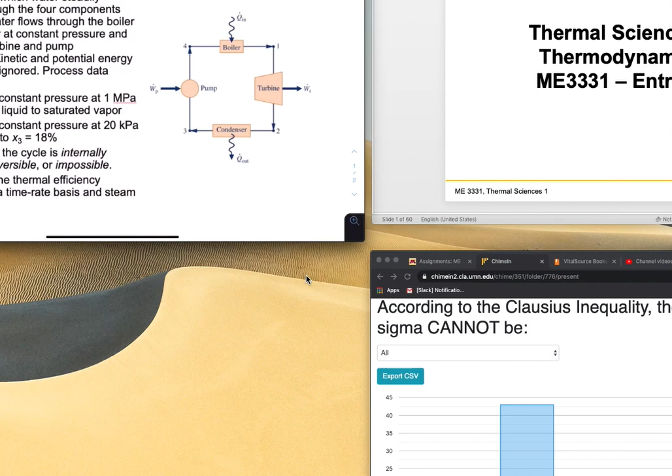Let me see if I can get the right slide up here. Okay, so as usual at the beginning of our lectures, we consult the previous survey question that we had, and let's see how people did here. Okay, not as good as previous surveys, but let's take a look here.

So let's see, greater than the net work output. Well, technically the value of sigma is not greater than the net work output. I mean, they have nothing to do with each other. As we remember, only the temperature is in the Clausius inequality.

As you remember, let's go back and look at what we did here. So if we look at the second law, we're going to do this example next. Let's look at it here. So here we go, this is it. Nothing to do with work in here. There's no work. It says here that the cyclic integral for some process that goes around in a cycle, or for any process for that matter, the change in heat over the temperature at which that heat transfer happens is equal to negative sigma of the cycle.

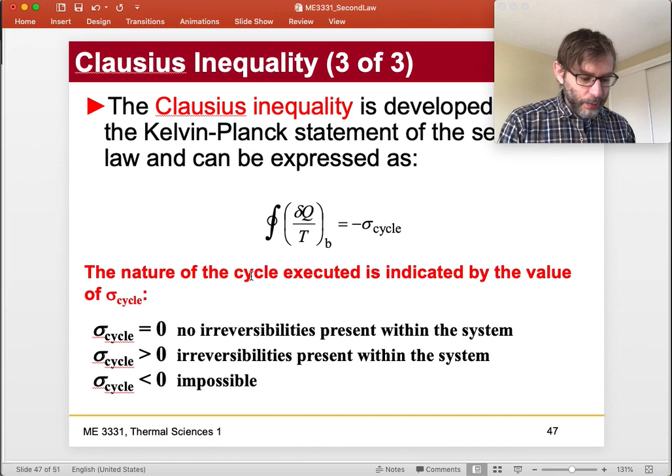Okay, all right, so let's see, what are we doing next? So the next thing we're going to do is a final second law example before we move on. And the final example given here is actually a little complex. It's a cycle, a thermodynamic cycle that we're going to solve.

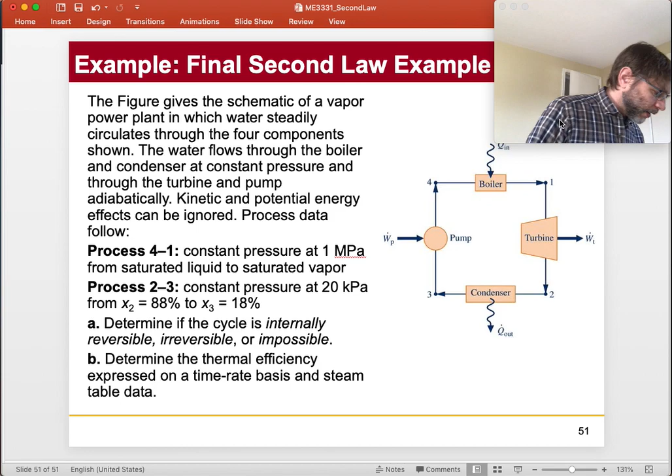To solve this cycle, let me get to the right screen here. Okay, so here we go. Here's the cycle. The figure gives a schematic of a vapor power plant in which the water steadily circulates through four components: a pump, boiler, turbine, and condenser. The water flows through the boiler and condenser at constant pressure, and through the turbine and pump adiabatically. Ignore kinetic and potential energy effects. And the process data are as follows.

So process 4-1 is a constant pressure process at 1 megapascal, operating from saturated liquid to saturated vapor. And then 2-3 actually operates within the vapor dome, it looks like, constant pressure at 20 kilopascals, from X2 equals 88% to X3, which is the quality at 18%. So it's dropping quality. Determine if the cycle is internally reversible, irreversible, or impossible. Determine the thermal efficiency expressed on a time rate basis, using the steam table data. All right, so let's do that.

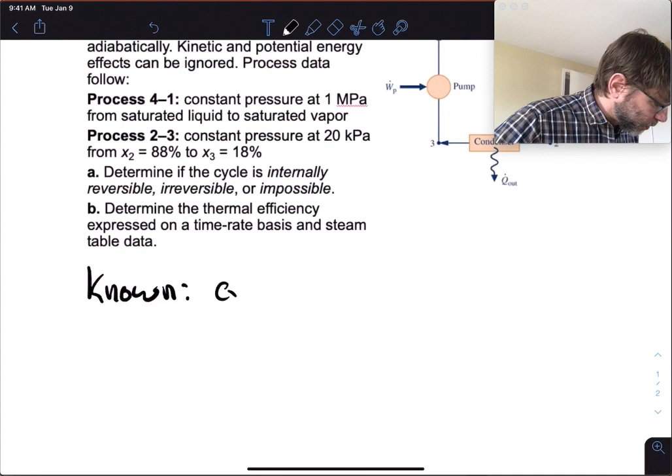Let's see, so let's see what we have here. I'm just going to start the process here. Then we have a cycle with given processes.

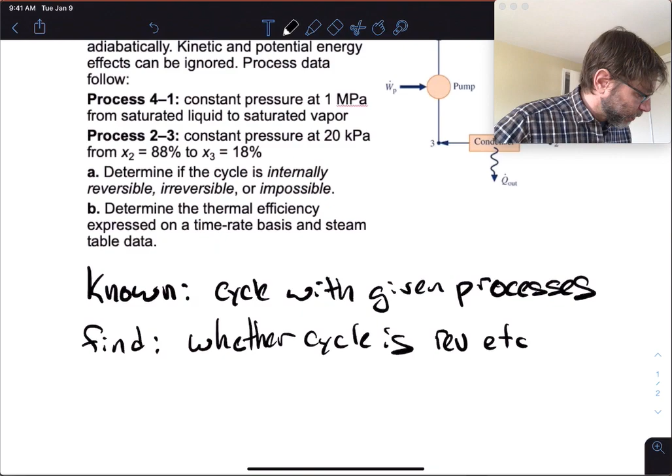What we're supposed to find is whether the cycle is reversible, etc., and also determine the thermal efficiency.

Thermal efficiency expressed in time rate based on steam.

Whoa, we got the cat again. Hello, this is Lola, by the way. She likes to jump up on my screen when I'm giving lectures. She can sit here on my lap, actually. If she behaves, she can sit on my lap.

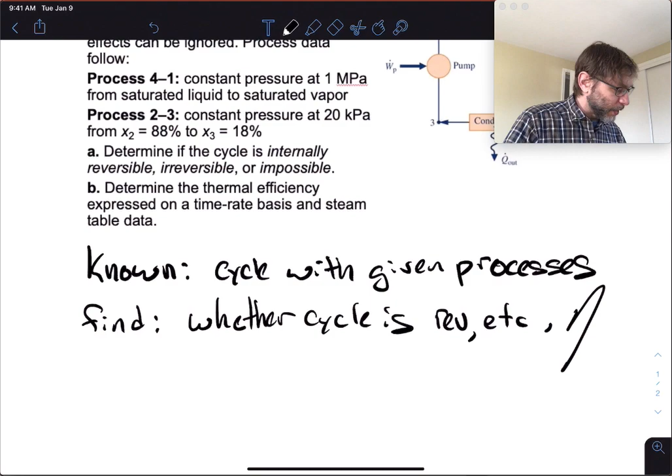And the thermal efficiency, okay, let's try to figure this out here. All right, Lola, you ready? Okay, let's do this. Next thing we're gonna do here is some assumptions.

So the assumptions are that we have, let's see, first thing is we're going to assume we have a steady state cycle.

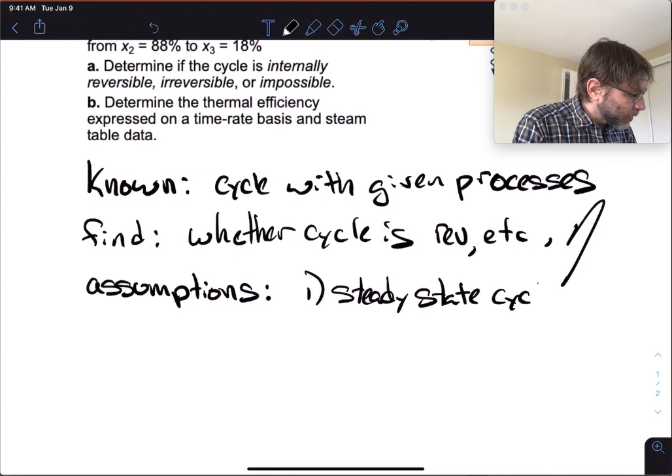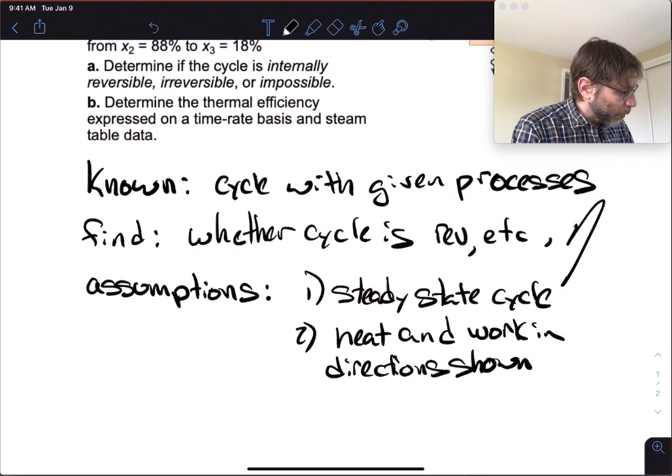Second, we're going to say that we have heat and work in directions shown on the diagram, but maybe we'll remake the diagram. Essentially our system is here, right, so that we have some work and heat kind of crossing the boundary, going in and out. So we're assuming this is Q in and Q out.

Okay, anything else we do? Let's see, we're gonna neglect kinetic energy and potential energy differences. Anything else? I guess we're going to assume that we have some adiabatic processes, so some processes that are adiabatic. Big deal, okay, we'll get into that when we talk about the individual processes.

Okay, so let's first make a diagram of what happens in the cycle. The one diagram we really need to make is a PV diagram, right? So we have P and V here.

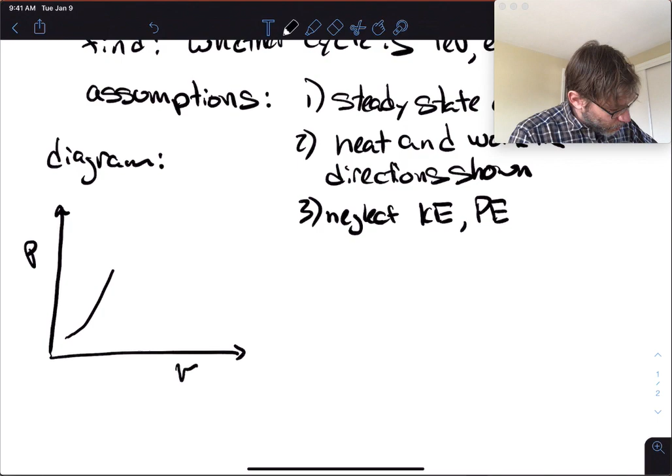Remember that whenever you have a cycle that operates with saturated liquid and saturated vapor, you've got to put it under the vapor dome. Remember, the vapor dome looks like this. Okay, oh, my vapor dome's a little lumpy. It kind of looks more like that. Okay, oh, that's a much better one. What do you think, Lola? Is that good?

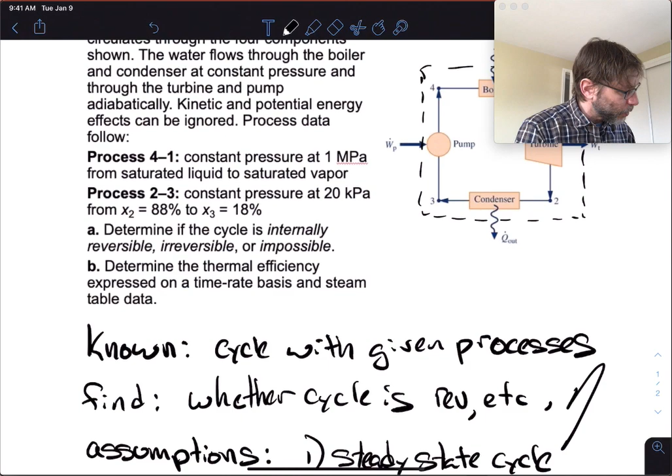Okay, now let's see, what processes are we talking about first here? Process 4-1 is a constant pressure at 1 megapascal, so it's at higher pressure. So process 4-1 here is boiler, right? So boiler is happening at constant pressure and there's heat going in, and it operates from saturated liquid to saturated vapor at 1 megapascal. So you know it operates from here, from 4 to 1, like that, okay? Remember that.

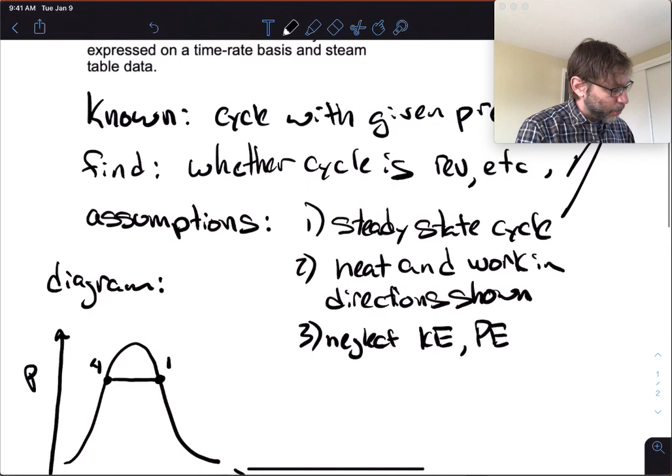Okay, so the first thing is, it's a constant pressure process, and it's going across the vapor dome at 1 megapascal. So then we could just make these things like this, right? This is at 1 megapascal. Actually, that's temperature, sorry, this is 1 megapascal, okay, we just say MPa here, okay, we can do that.

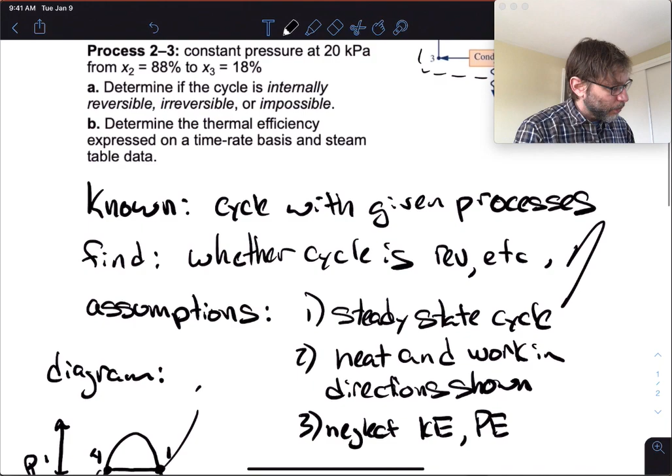And then we have process 2 to 3, which is the other constant pressure process at 20 kilopascals, from X2 to X3, which is 88 to 18. All right, so it's going to be kind of like, oops, put the eraser on, here we go.

And, whoops, let's see, so let's draw this constant pressure line like this, okay? And this is, let's see, let's get rid of this here. So this is 2, and this is 3, and so it's like this. So we're gonna have 1, 2, 3, 4.

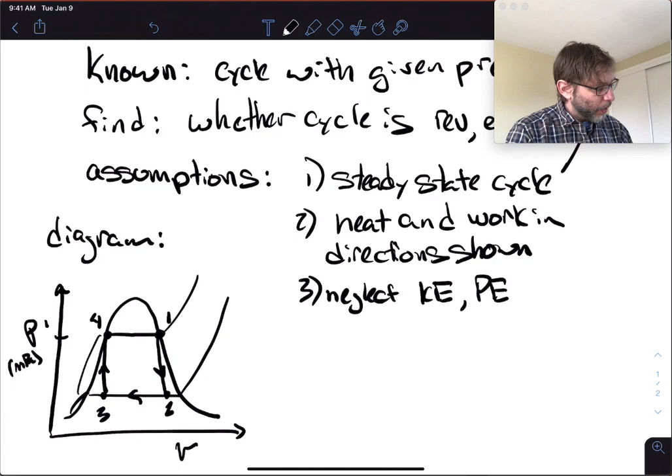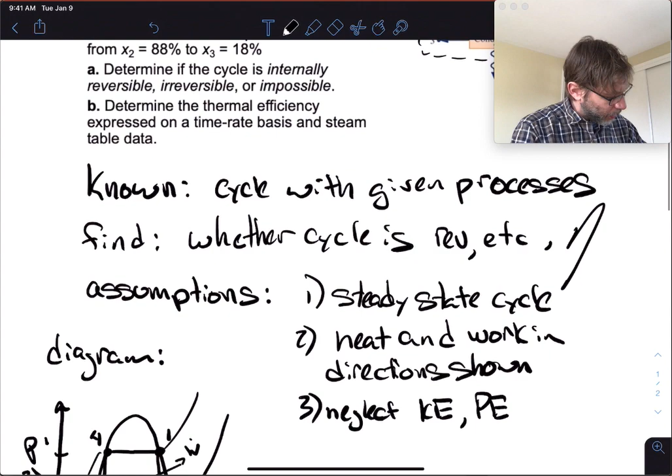Okay, so these are, well, let's see, water through the turbine and through the pump are adiabatic. So these are adiabatic. So 1 to 2, as you see up here, 1 to 2 is a turbine, we're making work, so we're just going to say we have some work here. 4 to 1, we have some heat in. So sometimes we do this in these cycles, so we have Q in, we have Q out.

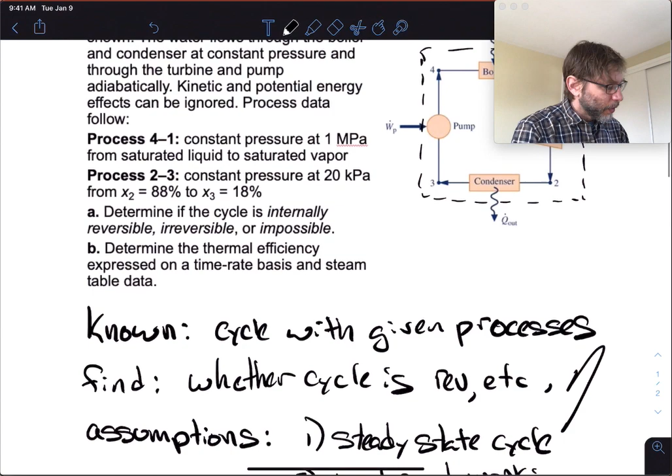We know right away that this cycle is possible, right? We're not exchanging heat with only one reservoir. We're making work, but we have some work going in here too. So this is an interesting cycle, actually, since we're operating all inside the vapor dome. This would never work—this pump would never work, actually. From process 3 to 4, forget it, you can never pump stuff that's all bubbly, saturated liquid stuff.

That would never work, okay? So no matter whether this is a thermodynamically possible cycle, it's an actual impossible physical cycle.

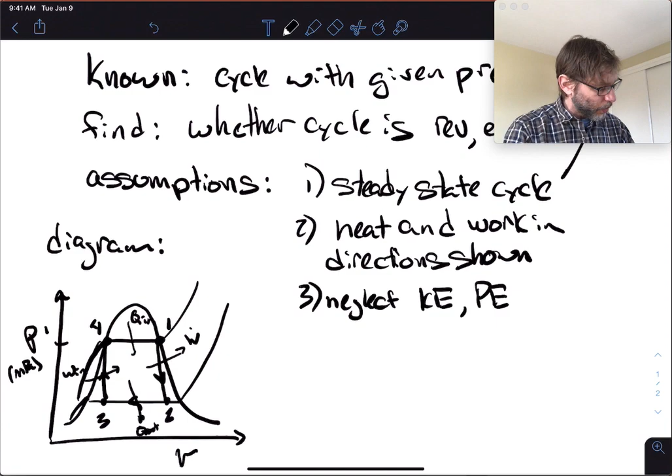Usually we do the pump. When we do the Rankine cycle, we'll tell you all about this. But for now, this is our process: 1, 2, 3, and 4. Okay, I think we're good now.

So we have work in and work out. I think that's what they're calling it here - work turbine, work pump. I'm going to call it work in and work out. Okay, all right, so now...

Let's do analysis here. So what we're really trying to find is the sigma to determine whether the cycle is irreversible, impossible, or reversible. So we're going to use this one.

And remember, as I said, this has nothing to do with the work. Who cares about the work? This is all about the Q. So Q dot 23 over the temperature at which that happens, T23. In this case, T23 is constant - phew, no integration necessary.

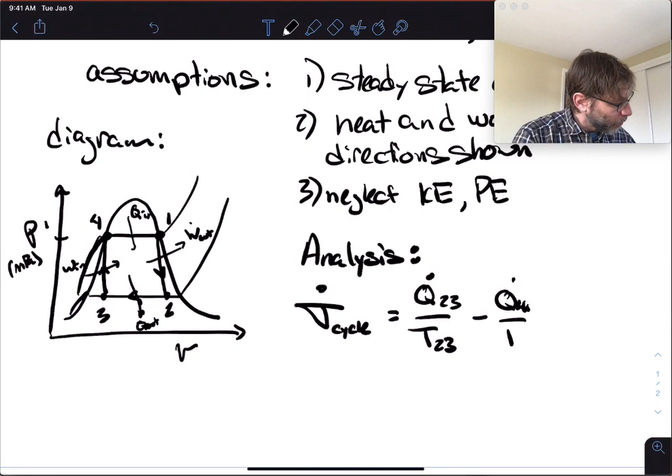Okay, and then minus - let's see, we have minus the Q41 over T41.

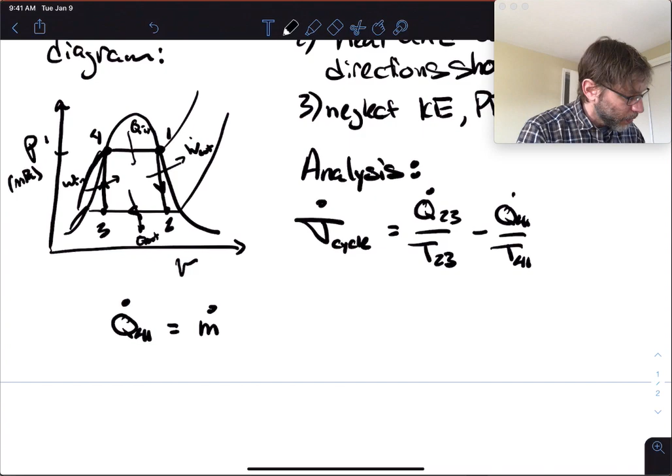Now how are we going to solve this? So Q41, let's do the first law. So Q41 equals m dot times H1 minus H4. Is that right? Yeah, because essentially we have no work term, plus work term, we're going to just call it 0. So this is what we call Q dot in.

Right, and remember, so this is example 1 continued. So then remember what we have to do is look at the vapor table, so we look at the PV diagram. This is actually a little easy to look up.

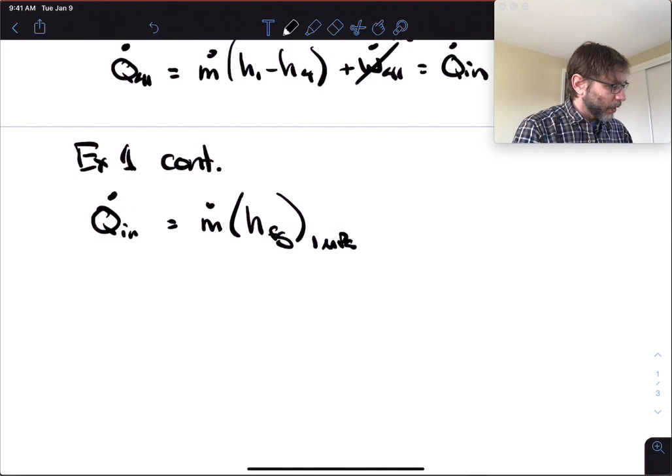Because if we have 1 megapascal, this Q in is equal to m dot times HFG, which is HF minus HG at 1 megapascal, and that's pretty simple to find. We're going to just have to find this later, but if we want to do Q23, we're going to need to find that.

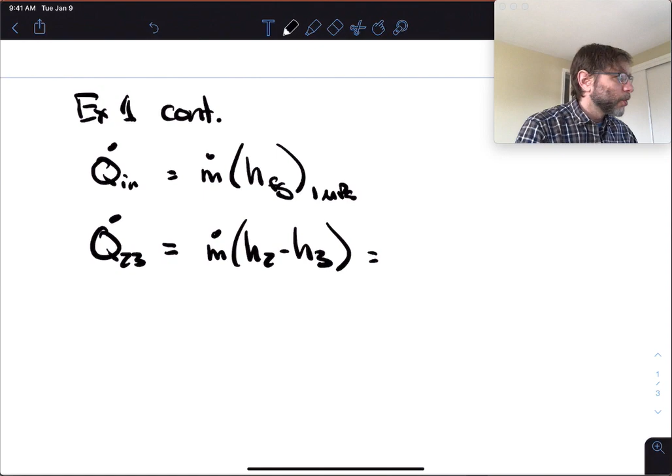So Q23 is also equal to the same thing, m dot times H2 minus H3. But in this case we have to use the steam quality, so this is going to be m dot...

Remember that m dot is constant because the cycle is at steady state and the fluid is going all the way around it. So there's no - the cycle is constant.

So then m dot times HF plus X HFG evaluated at state 2, minus HF plus X HFG evaluated at state 3. These are at the same pressure, so this is actually not so bad.

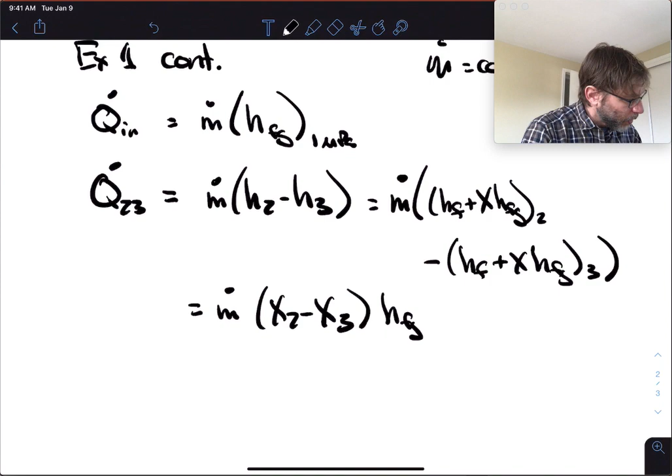So this is not so bad, right? Yeah, X HFG. So we can simplify it - m dot, because they're at constant pressure, we can just say this is X2 minus X3, HFG at 20 kilopascals.

Okay, all right, so let's do this. So yeah, all right, good, so this is pretty good. So HF - remember HFG is equal to HF minus HG at some pressure.

Okay, remember that, just wanted to make that clear. Don't get confused by that. Okay, all right, so let's see.

So then let's just plug that into our sigma of the cycle equation, which is equal to X2 minus X3, HFG at 20 kilopascals, over T23, which is Tsat, the saturated temperature at 20 kilopascals.

And then we can look up these things at the pressure table. This is HFG of 1 megapascal over T41, which is Tsat at 1 megapascal.

Okay, all right, so if we look at the saturated pressure table, which is from table A3, I'm not going to look at the table. I'm assuming you guys are good enough by now to figure out where the table is. I have the numbers copied down here, so I'm going to just use the numbers.

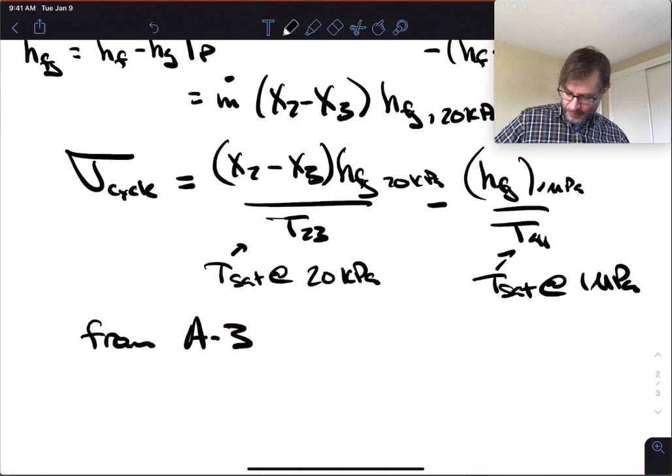And the cat is shedding all over me, so this is springtime - springtime with kitties. Okay, here we go. Yeah, okay, she's still here. You like thermodynamics, huh? Or you're hungry, either one or the other. Okay, so let's go.

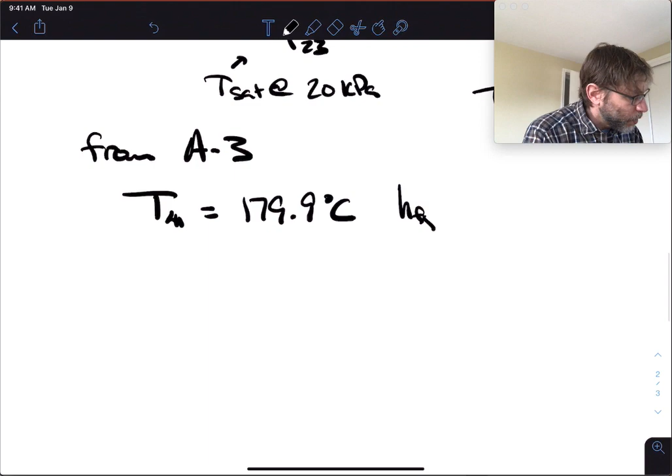Let's see, T41. So Tsat at the higher pressure is 179.9 degrees C, and HFG at that pressure is equal to 2015.3 kilojoules per kilogram. Make sure I get my numbers right.

So if we plug all these things in, we're not given m dot, but we can just divide by m dot. No big deal, because m dot's constant and it doesn't really change the direction of the sign because it's being multiplied by the whole thing. So it's not a big deal, right? In fact, I think I should have done that already up here, because I got rid of m dot already.

Okay, so if we do all this and plug all the numbers in, we get 0.88 minus 0.18, which are the qualities, times 2358. I'm just going to leave the decimal places off because it's not going to make very much difference.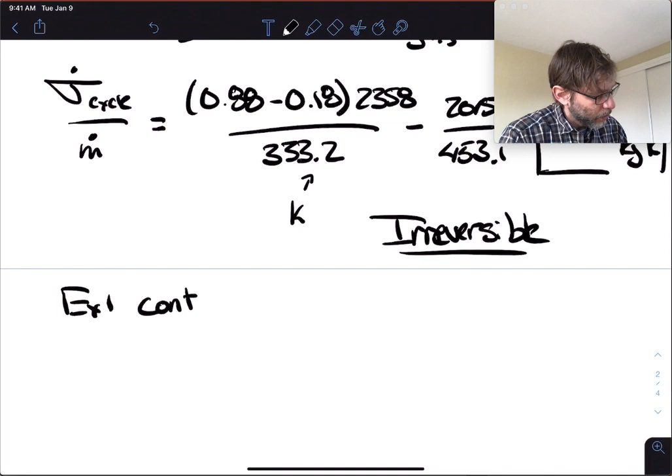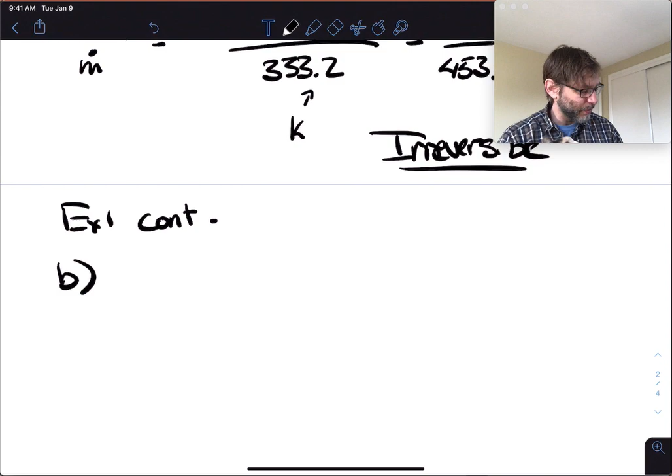And then we're going to do part B now. So part B is asking for the thermal efficiency of this cycle. Just think back. What do you remember about thermal efficiency? What is it? No, that's not it. Okay, so thermal efficiency is work of the cycle divided by heat in.

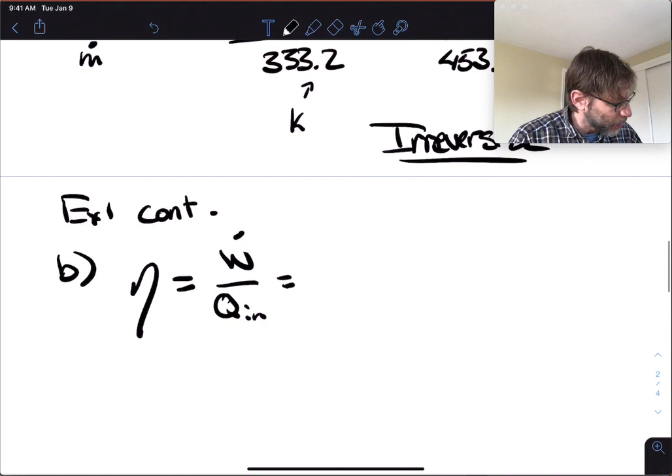Okay, so we are calling this W net, so this is net work of the cycle. So net work of the cycle is the work out minus the work in, right? Presuming we have net work out, which we're just going to presume in this case.

So Q dot, make sure these are dots. This is if we just do the first law, because we already know how to do the first law for a cycle, it reduces to this, right? Because you can say the work is equal to the net work out minus work in is equal to heat in minus heat out. Okay, and then you can just get this following equation, and then we already know what those are because we just solved them.

1 minus Q23 over Q41, with the dots. And then of course we don't have the dots, but we can always just divide by mass flow and we can get it.

So then we're going to end up getting 1 minus x2 minus x3, hfg23 over hfg41, right? And this is equal to, if we plug this all in, I'm not going to put the numbers in, 0.18 or 18%.

Pretty bad. 18% thermal efficiency, that's really bad. If we had a steam power plant that had 18% thermal efficiency, yeah, we would be paying a lot for electricity.

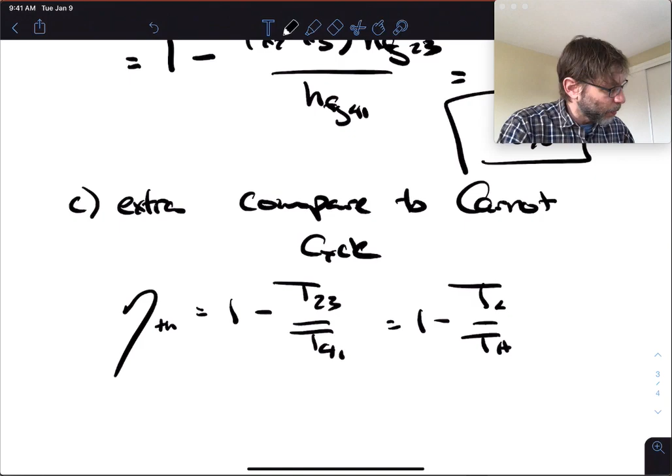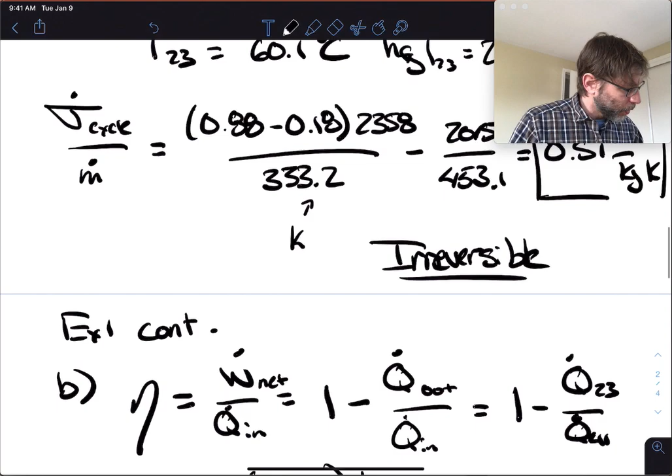So then TL over TH, this would be 1 minus 333.2 over whatever the temperature that we had up here. What was it? 453.

453.1 is equal to 0.265, or 26.5%. So thinking about it, if we wanted to be fancy, we'd say ideally, if this cycle were operating under a Carnot cycle, it could have 26.5% thermal efficiency, maximum.

Then sigma would be 0. All right, but we actually got 18%.

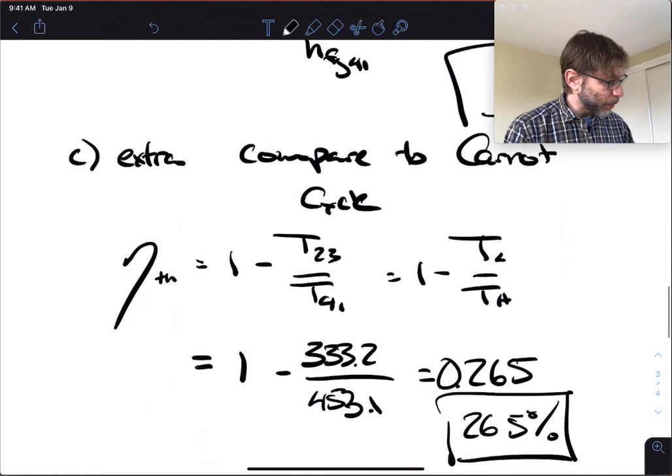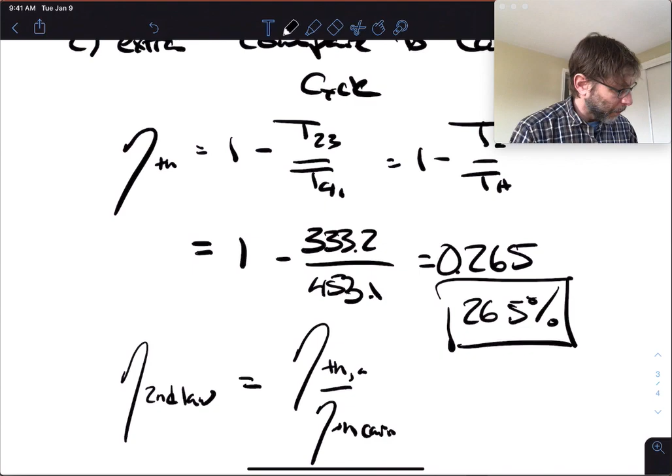One could come up with a metric called the second law efficiency, which is equal to the actual thermal efficiency, the first law, over Carnot. I have not calculated this yet, so we could say 0.18 divided by 0.265.

Let's see, do I have a calculator? I got a new phone, so I'm not going to find the calculator easily, but oh yeah, here we go. 0.18 divided by 0.265 is equal to, we can say the second law thermal efficiency is 67.9%.

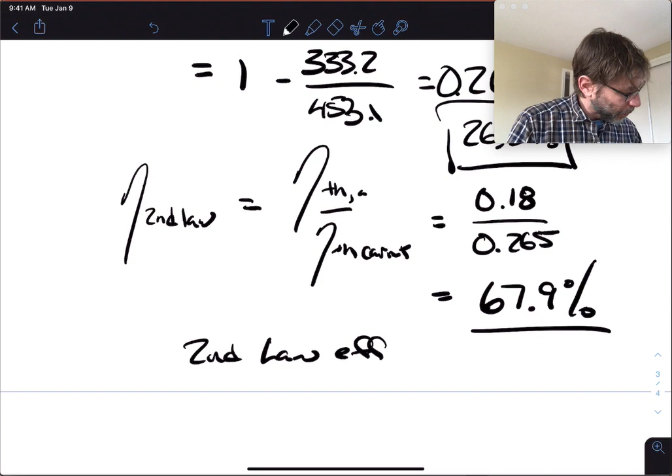We call this the second law efficiency. That's not in the chapter, I'm just giving that to you as bonus extra stuff.

We can develop a first law efficiency, which is the work out over the heat in. So we'll call this actual. This is a first law efficiency, and we'll call this a second law efficiency.

67.9% means we're getting 67.9% of the ideal efficiency for this cycle. We could get a lot better than that, right? We can get closer to the ideal efficiency if we use better processes.

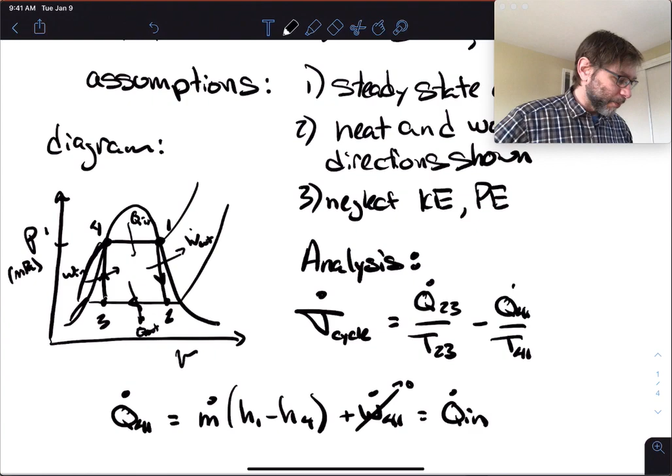As I said earlier, developing a pump that doesn't operate over such a huge temperature difference would be ideal. But from 3 to 4, pumping fluid that's in the two-phase region is never a good thing. So chances of that actually happening in real life is poor.

Okay, so that's it for chapter 5. Let's be done with chapter 5 and move on. So the next thing I want to introduce to you is the concept of entropy.

The concept of entropy is, as I said, pretty enigmatic. It's derived based on the second law. People say it's a result of the second law, the property itself, entropy. I may not have time to give you a full treatise on this, but we're going to do our best and get as far as we can.

In this chapter, we're going to explain the key concepts related to entropy and the second law, including entropy transfer, entropy production, and the increase in entropy principle. It's very close to the sigma idea, the idea that sigma is always positive. We'll evaluate entropy change between two states, and analyze isentropic processes using appropriate property data.

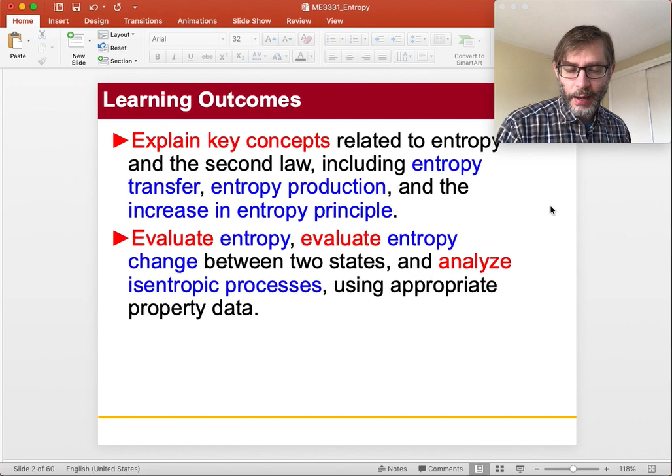So spoiler alert, isentropic process means adiabatic, meaning no heat loss, and reversible, meaning the process operates in a reversible way. We'll represent heat transfer in an internally reversible process on a temperature-entropy diagram. The TS diagram is going to be our new TV diagram.

We were doing PV and TV diagrams. TV and PV diagrams are kind of redundant. But if we look at the TS diagram, that actually gives us further information. It really can give us insight as to what's happening in the process or a cycle.

We're going to analyze closed systems and control volumes, including applying entropy balances. We're going to use isentropic efficiencies for turbines, pumps, compressors, and second law analysis. Kind of like what we just did, kind of like the second law efficiency, except we're going to come up with first law efficiencies for turbines and compressors that compare them to ideal processes. So it's almost like a second law efficiency, I guess. But yeah, you'll see, that's not for this lecture.

Okay, so now let's go here. Entropy change and the entropy balance is the first thing we're going to talk about. So mass and energy are all familiar, extensive properties, right? Extensive meaning they depend on mass.

Mass, of course, depends on mass because it's mass. Entropy is another important extensive property. Just like mass and energy are accounted for by mass and energy balances, entropy is also accounted for by an entropy balance. Yeah, of course, I'm not telling you what entropy is yet. Like mass and energy, entropy can be transferred across the system boundary.

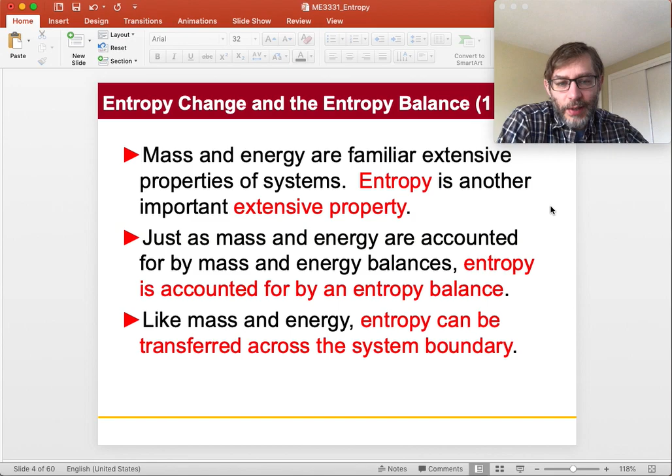So whatever it is, it can be transferred across the system boundary. Now, the entropy change and the entropy balance are developed using this Clausius inequality, the thing we just worked on with that example with the steam going around the cycle, where we said that sigma for the cycle equals 0 for a reversible process. Sigma greater than 0 is irreversible, and sigma less than 0 is impossible.

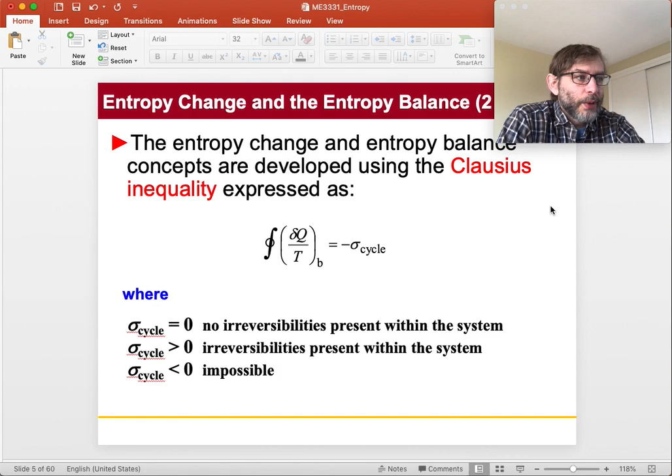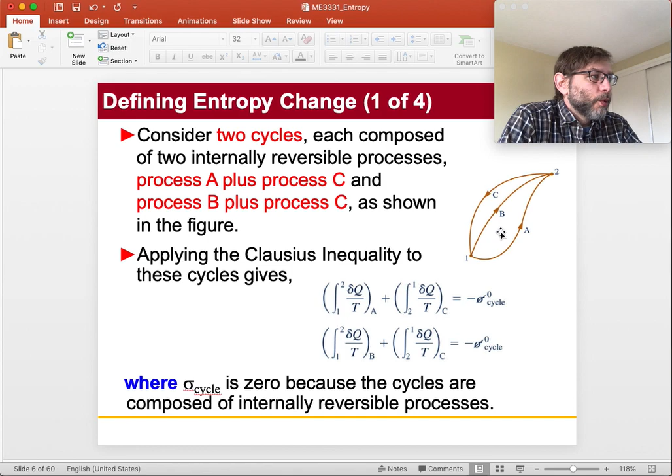So consider two cycles. One going around this loop here. Let's make it bigger, that's better. So the first thing we're going to look at is the cycle going around here.

So the cycle going from 1 to 2 and back, 1 to 2 and back, internally reversible processes, both reversible, meaning you can go back and forth. Process A to B and B to C, and so on. Applying the Clausius inequality to each one of these cycles, essentially integrate from 2 to 1, because obviously the temperature is not constant, so maybe the heat's not constant either. I don't know, it's changing.

Across the cycle, the process from 1 to 2, you get essentially that the sigma for the cycle has to be 0 because it's a reversible cycle. Likewise, for the process going the other direction, B and C, taking that route, we also have sigma equals 0. So sigma for the cycle was 0 because the two cycles are composed of internally reversible processes. So the reversible sigmas are 0, both paths.

We call that path independence. It doesn't matter what happens between 1 and 2 and back from 2 to 1. If the cycle is internally reversible, sigma is always 0.

So what this means is that if we subtract these two equations, since A and B are arbitrary internally reversible processes linking states 1 and 2, it follows that the value of the integral is independent of the particular internally reversible process and only depends on the end states, so it only depends on 1 and 2, the state at 1 and the state at 2.

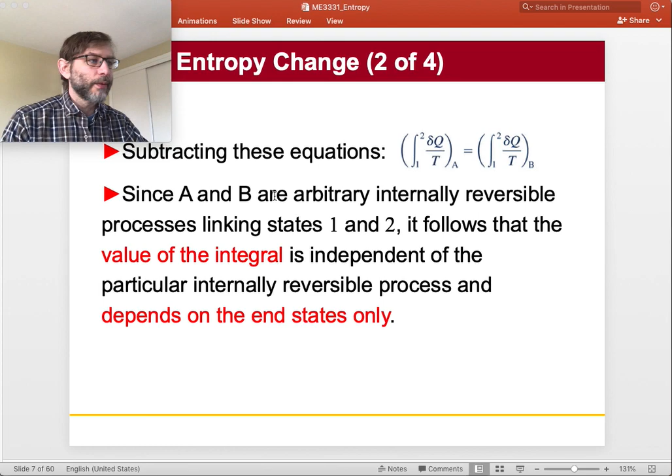So that's where we develop a property, because we said from chapter 1 — sorry, I'm moving myself around — recall from chapter 1 that a quantity is a property if and only if its change in value between two states is path independent. And we just said that the sigma is path independent.

So whatever happens doesn't matter. We conclude that the integral represents the change in some property of the system, and we call this property the entropy, and the property is evaluated by this.

So for an internally reversible process, note, internally reversible process, the change in some property S2 minus S1 is equal to the integral from 1 to 2 of delta Q over T, internally reversible.

Now, remember, this is the process, it's not the cycle, right? Because we said for the cycle that if we go 1 to 2 and then 2 to 1, it would be, for an internally reversible process, it would be 0, right?

Sigma would be 0. But in this case, the sigma that we would calculate, like we were just calculating in the previous example, is now equal to some change in entropy from that state. So we're not talking about a cycle anymore, we're talking about a process going from one state to another.

So now we have an internally reversible process from 1 to 2. So the internally reversible process means that they develop some sort of change in entropy, some sigma, which is equal to some change in entropy. I hope that makes sense. I really hope it makes sense.

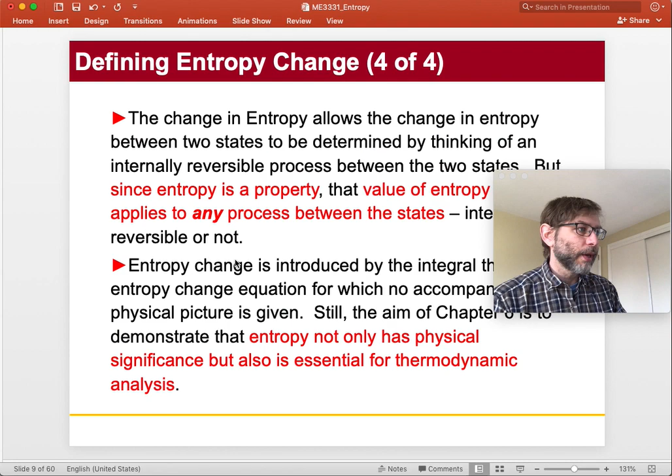So we can look at entropy and also see what the units might look like. Since it's Q over T, we know it's kilojoules per K. So big S is kilojoules per K, and little s would be kilojoules per kilogram K, specific entropy, which is the next line here.

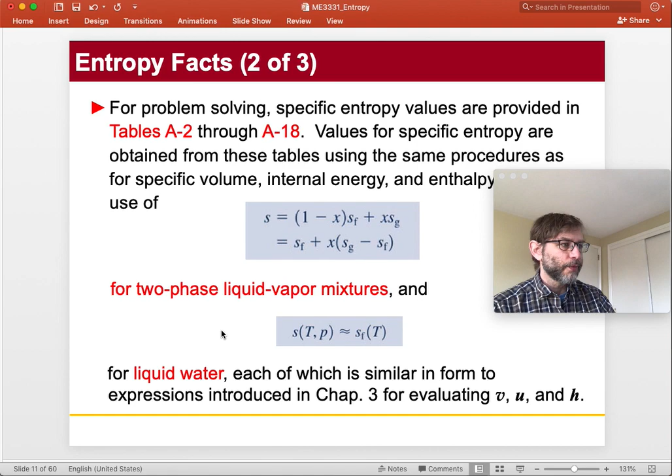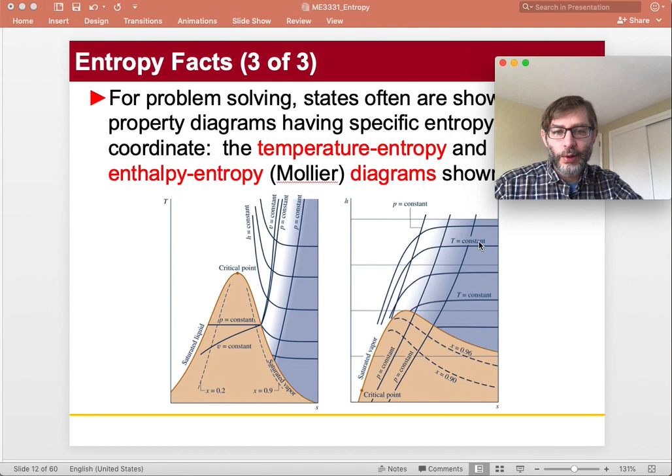Up here because it's obviously very superheated, right? Superheated nitrogen and oxygen is where we are. So this is kind of showing evidence that as you get into this vapor-only or superheated vapor region, the enthalpy is only a function of temperature. So that's what we're trying to say here. But anyways, that's the only thing interesting about this.

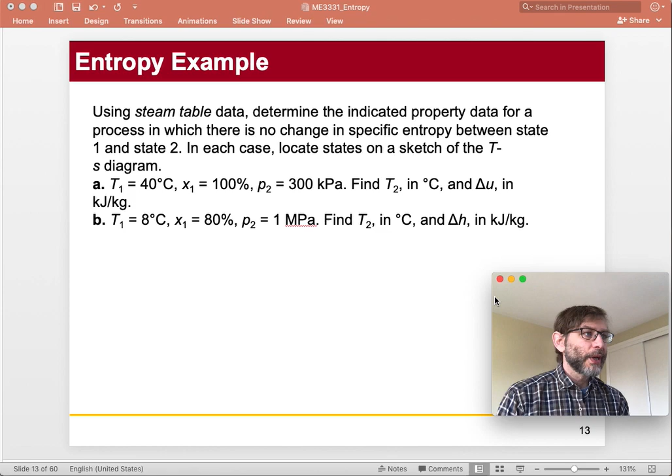All right, the last thing I want to do, as an example, before we end class today, is to talk a little bit about using the steam table data and determining the property data for a process in which there's no change in entropy. So let's see.

Uh-oh, my iPad just died. Well, it didn't die, but it needs to look at me or something. Okay, so...

All right, here we go. Here's the example, and let's solve it. Okay, so the process looks like this. So what do we have known? We'll just say known: we have property information about steam.

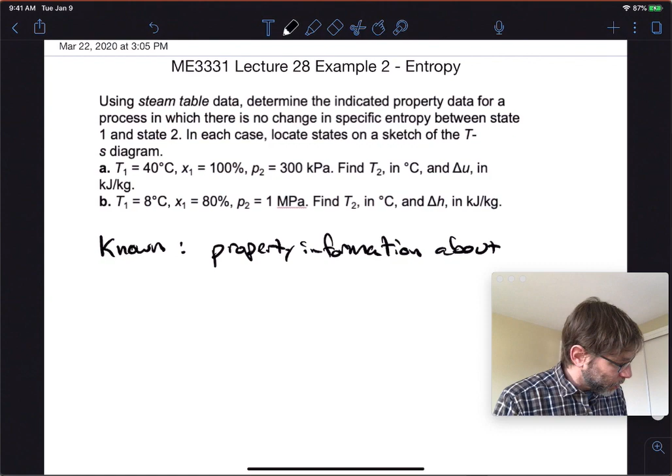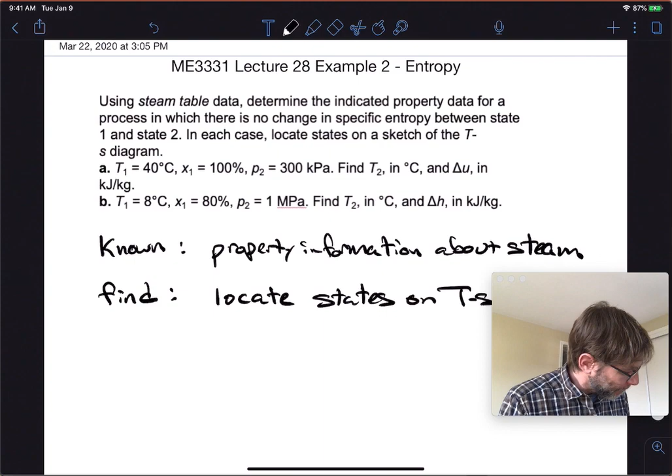Okay, we're supposed to find—we're supposed to locate the states on a TS diagram. So we're supposed to locate them on a TS diagram.

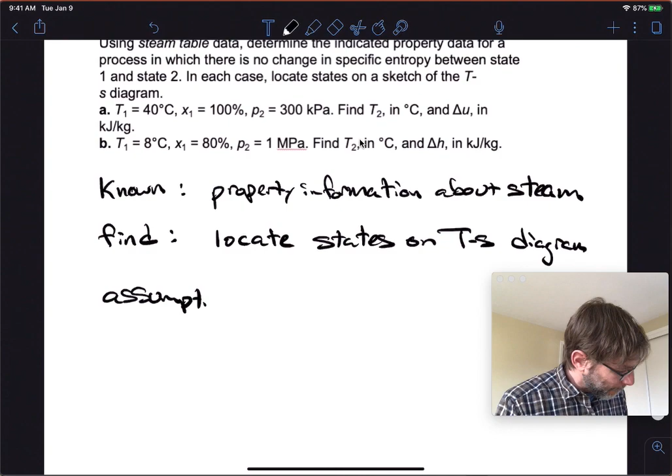Okay, so the next thing we're going to do is look here at what the TS diagram looks like. Well, the diagram is part of the analysis. So let's go. We're gonna—I don't know if we need to make assumptions, but we'll just say none, because we're looking just things up on a TS diagram. We're not really making assumptions about these things. We're not actually solving any problem here.

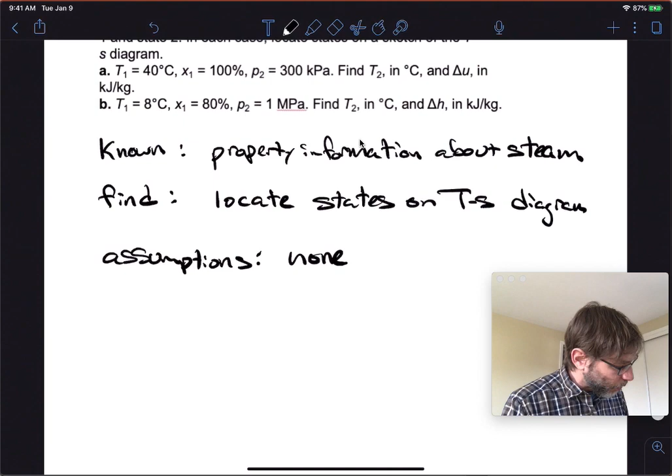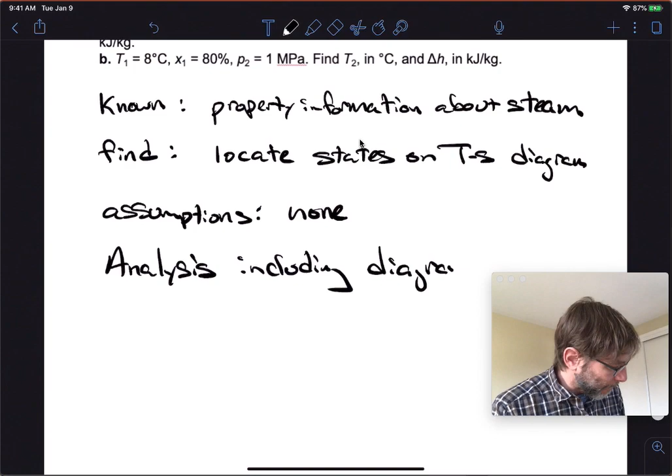All right, so then what we're going to do is we're going to do an analysis, which includes a diagram. Diagrams. Okay, so then A is given as T1 equals 40 degrees C,

and T2 in degrees C—oh wait, we have a process here. No change in specific entropy. Oh, we have a process. Sign states on a T-s diagram for a process.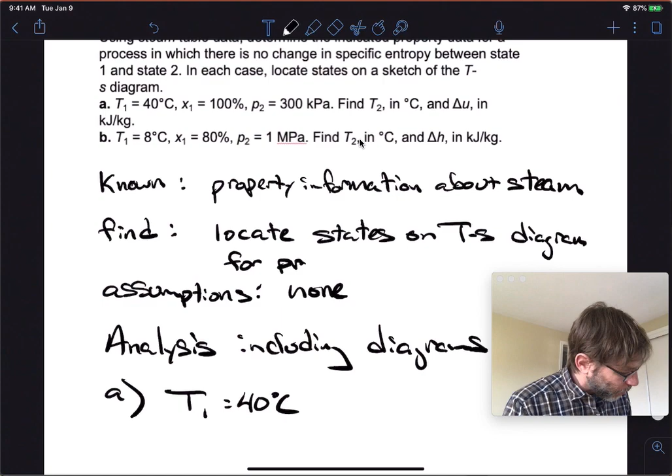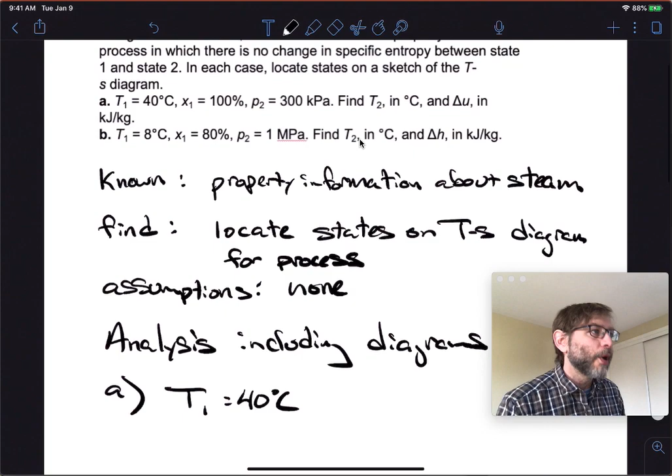Okay, I didn't really look at the problem, sorry. Let's see what it says: determine the indicated property data for a process in which there is no change in specific entropy. Oh, so S2 equals S1. That seems like kind of an important thing to know, right?

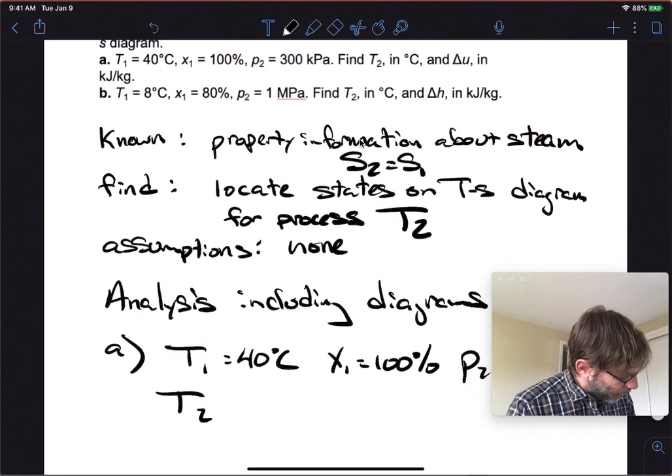Okay, so T1 is—let's see, X1 equals 100%, P2 equals 300 kPa, and we're supposed to find T2. All right. T2—oh, both things, we're supposed to find T2.

All right, so now let's do this. So let's see, T1... quality is 100%. So it goes like this. So we have a T and an S diagram. Now let's look here. All right, T1 equals 40 degrees C, so it's 40 degrees C. So this is 40,

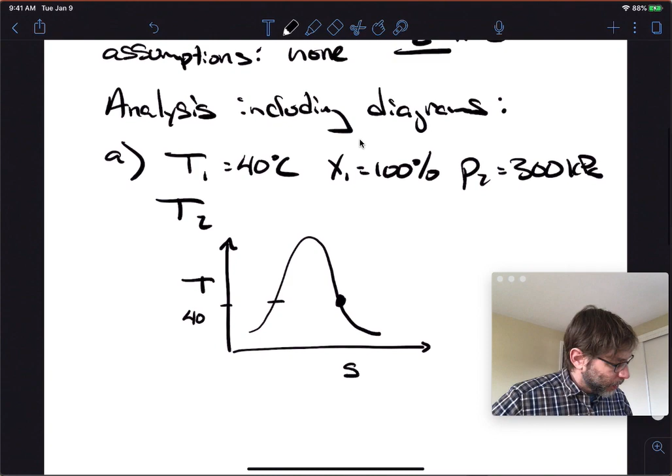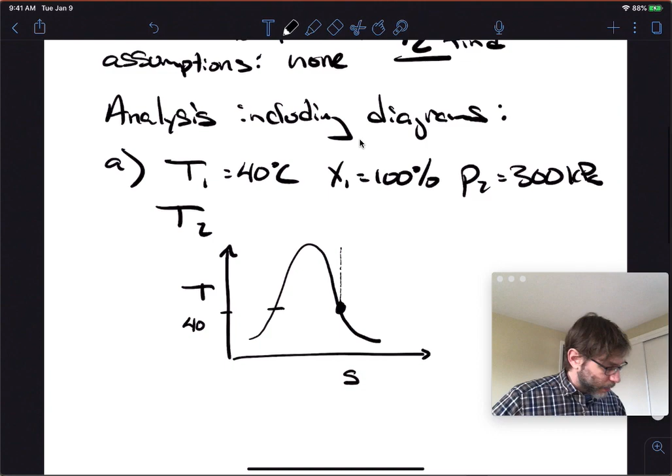right? And then so it's going to do something like P2. So the entropy is going to stay the same, right? So it's got to do something here, because P2 is equal to 300 kPa, and I guarantee that 300 kPa is higher. So this is on some constant pressure line. And then this is, so we're going to have superheated stuff.

Let's get rid of this, make a better one. Okay, there we go. All right, so our TS diagram's like this. And then this is state 1, and this is going to be some state 2. This is 300, this is some unknown.

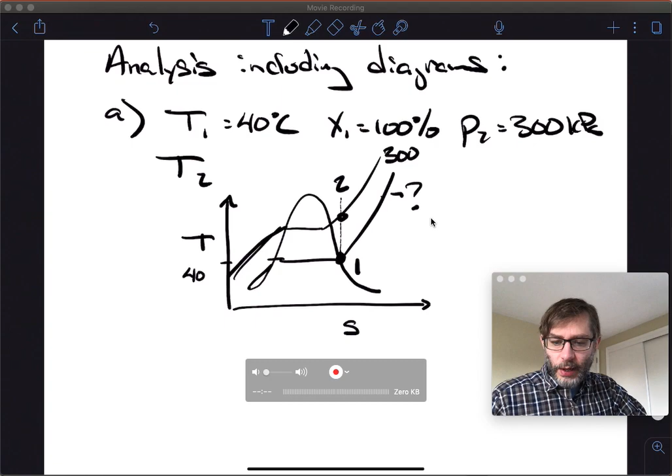All right, so if we look this up in the tables, let's just do that quick. I'm running out of time. Let's just do that quick. Let's see if I can look at my book here. VitalSource—there it is. Let's look at here.

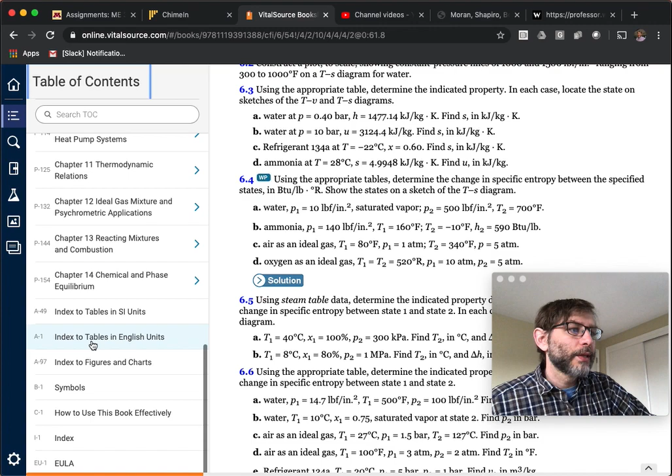Let's look at tables. SI tables, let's look in table A2. So the first thing we're going to do is look in table A2, we're going to find what this pressure is.

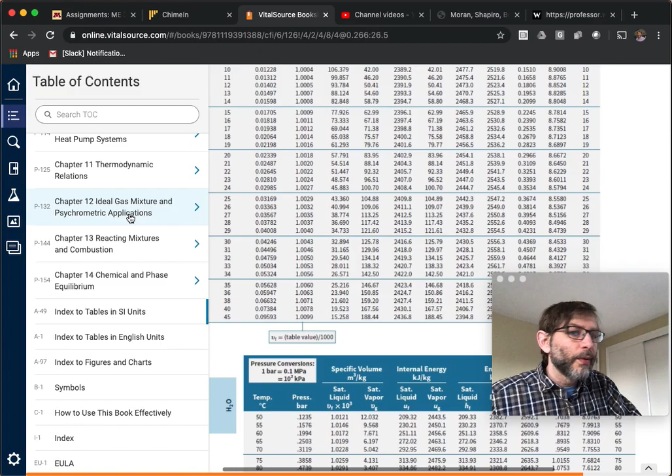All right, good. So we know that we have to go up. What we have to do is look up and find out where this is. So we're going to have to maybe interpolate in the next table. We don't have time for that because I'm running out of time, but let's see. If we go to table A4, we can find out where it is. I have the answer, so at least I'll put it in the solutions.

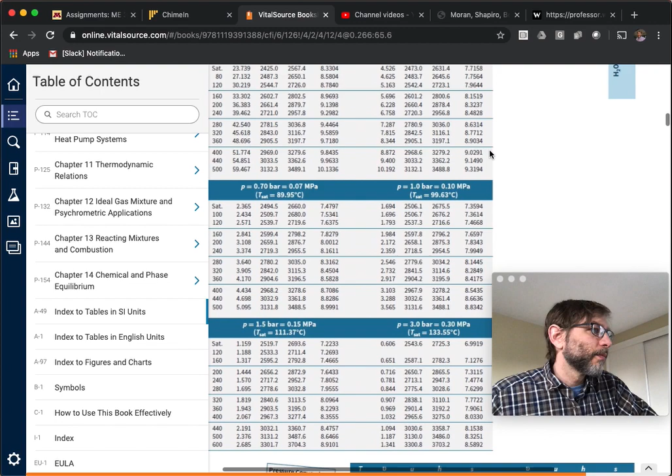A4 is superheated at 300 kPa, that's 0.3 megapascals. Do we have it? 0.3 megapascals, here we are. Okay, so what temperature are we at?

It looks like the entropy was 8.2, and S2 equals S1, equals 8.257. And so this falls here, if we look, 8.257 falls between 440 and 500. So if we interpolate from table A5, is this A5 or A4?

We get T2 is equal to 476.2 degrees C. Okay, 476.2 degrees C, so that's how we get it.

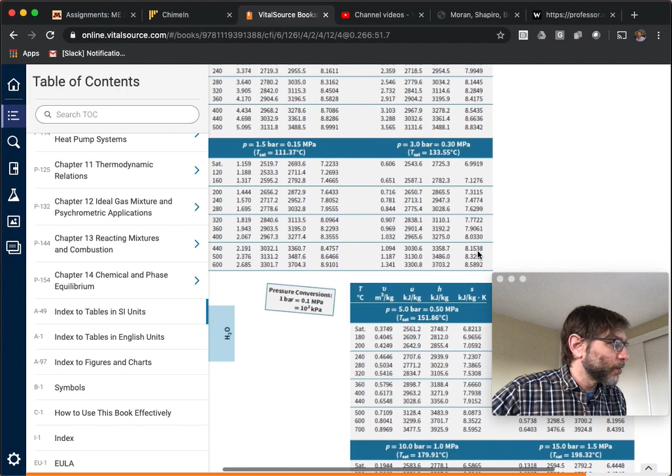Okay, that's how you got your T2. Did I ask for the delta U? It asked for delta U as well. We can calculate delta U, so delta U, let's see, I calculated U2 minus U1.

U1 is UG at 40 degrees C, which is equal to, if I look at here, UG at 40 degrees C, which is 2430.1 kilojoules per kilogram. And then we also know that we have to interpolate.

We have to interpolate to find U2 at 476.2 degrees C and 0.3 megapascals. And then U2 is then equal to, what is it here? I have the answer here. U2 is equal to 3090.5 kilojoules per kilogram, and so delta U is equal to.

3090.5 minus 2430.1, which is equal to 660.4.

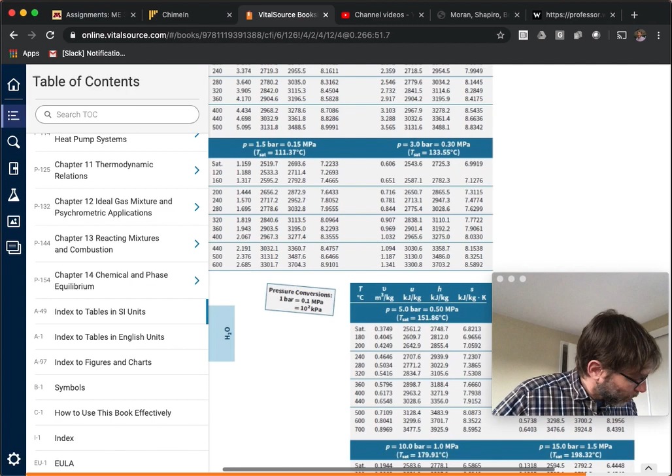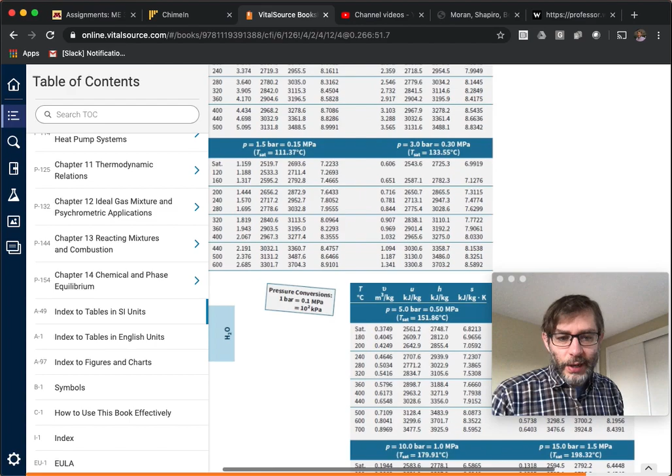Okay, so I'm out of time, so what I'm going to do is do the second example problem myself and post it in the solutions. But you can see here, I haven't been copying this down because I've been looking at the tables. So here's my solution: delta U equals U2 minus U1. Interpolate to find U2, and U2 equals 3090.5, and delta U then is 660.4.

Okay, so you'll have an opportunity to practice this. They'll give you something like this for your homework, but I recommend you look at my example solution, and you can solve this.